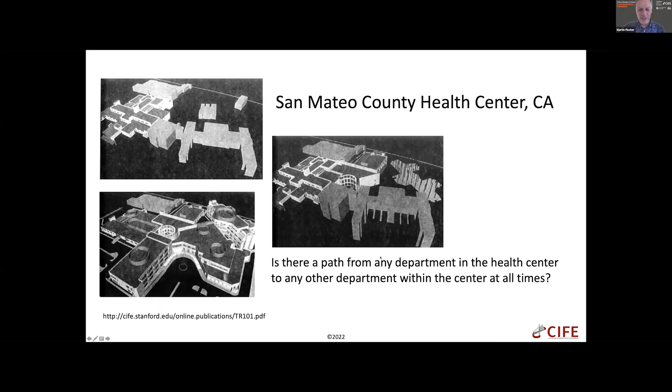But if I summarize this in the VDC framework, the hospital operations needed to go on fully during renovation and extension, like that constraint in terms of access from every department to every other department within the hospital. Also, from a contractor perspective, from a project objective, they wanted to complete the work on schedule and without delays due to interference with hospital operations. So they wanted to keep being productive as builders, which they wouldn't have been able to do if there was interference with the hospital operation.

So some of the methods they deployed: we had weekly ICE sessions with the construction team and monthly ICE sessions with the client to review the construction schedule. And we also had the goal that we wanted to complete all of the construction, hospital operations, and appearance checks in 3 months. I think we managed to do it in 2.5, if I remember right.

On the BIM side, we needed a 4D model with construction activities, including temporary structures, at a level that allowed connection with the hospital activities. And we wanted to resolve 100% of the interferences we found each week. In terms of the process, we needed the construction schedule at the level of detail to understand this relationship with hospital operations. And we wanted to make it so that we could update the 3D/4D model every week with what was discussed in that ICE session.

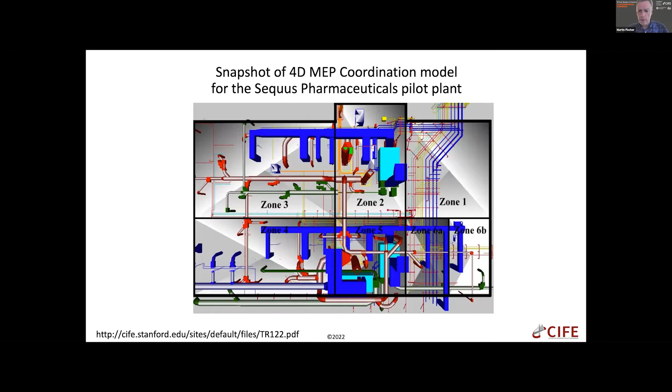And again, as I reflected in preparing for this talk about the application of the VDC framework, for the startup it was really, really critical that they could start to use the pilot plant on schedule, because their investment was tied to scaling up their technology. So the project team had to complete the construction on budget and schedule, and here they also had this objective of learning about 5D modeling.

Not surprisingly, we wanted to resolve all the conflicts, and they were managed at a much more detailed level, in terms of the 3D coordination, but also the daily construction coordination. We wanted to manage them every week, and basically that's where you see the controllable factors described as weekly sessions with the 4D model with detailed construction activity at the daily level, integrating the GC and the MEP schedules.

Similarly, the starting point was maybe slightly different here in terms of aligning the cultures of the project team. But then very quickly, we really integrated the organization, as you could see with the architect, engineer, general contractor, MEP contractor, supported by this 5D model. But also in creating this 5D model, the major process changes came in terms of these weekly coordination sessions. In 1997, that was not typically done.

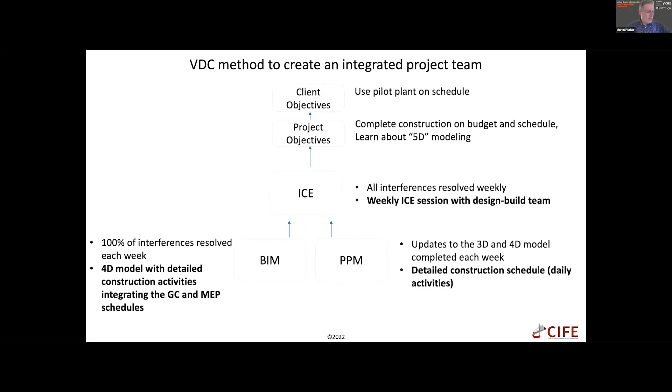And the third example I want to share is more recent. Our first full, what I would say full is always a tricky word, but full optimization project, was done with Filippo Ranalli and many other parties you'll see in a minute. This was an office building in California, and included a developer, general contractor, structural engineer, steel fabricator, and steel erector. It really was motivated by Brian Grass, the project executive for this project for DPR. He was wondering, after seeing a presentation on optimization of structural design and automation and optimization, whether we could create faster and fuller feedback on architectural design.

So, you know, these design cycles are just incredibly slow, and then we end up with a structure that's, I'm not so sure, really optimal. We were also curious to really push the limits of optimizing structural systems and understand whether that's worthwhile, and what the impact of that is. So here, again, from the research side, we wanted to study the technical and organizational feasibility, effort, and impact of an optimal composite steel concrete structural design.

As you can already imagine, there are quite a few issues. We had to get access to the structural engineer and the analytical model they had done in great detail. We had to get access to all the fabrication, construction, and erection cost data, because otherwise we would be limited to just optimizing for the steel weight, for example. We also had to get access to the development constraints and the architectural objectives and so forth. But I'll come back to that.

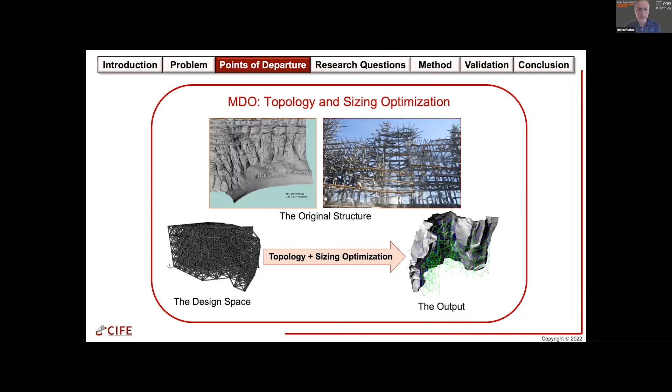As a result, the secondary steel connecting the face of the mountain with the primary steel is always on the critical path. There's never enough time, and you end up spending typically much more money on the secondary steel because you just have to make it happen. So this theme park operator was wondering whether this structural steel design for the secondary steel could be automated.

Filippo was working on that project as a summer intern, and it was really quite surprising and amazing to see the results in terms of the weight reduction we were able to achieve with an optimal steel design. It looks kind of similar if you look on the left and the right, but in fact it's 42% lighter and has 47% fewer unique connection details. So significantly better to erect as well.

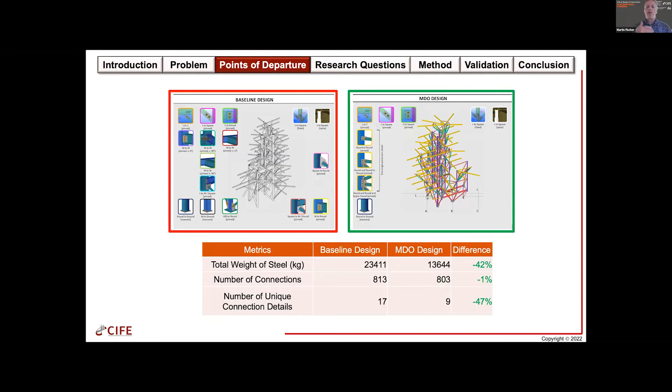But this was a relatively limited optimization problem, focused just on secondary steel. We were wondering what it would be like to take this to a whole building, or the structural design of a whole building with all the aspects. Is it feasible computationally? Can we get the cost data? Is the problem size just too big? Can we break up the problem in ways that make it feasible and also useful in the industry?

So the building on the left is not exactly the building we looked at; the actual one is larger and more complex, but for confidentiality reasons we can't show it directly. It's a major office building, 20-30,000 square meters, the kind you'd find in a downtown area of a major city here on the West Coast. We actually worked with two buildings, one where we could learn how to do the optimization, and a second one where we could test it.

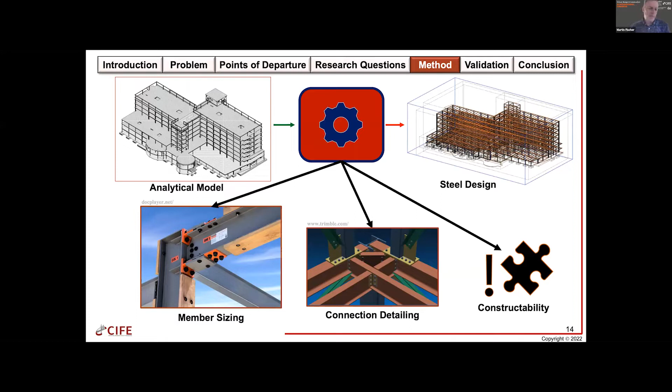I'm going to show the results of the test. The goal was to optimize the steel composite design of the steel and concrete structure, including member sizing, connection detailing, constructability, material cost, erection cost, fabrication cost, and of course structural safety and code compliance, all of which could not be violated. So this is what we're trying to show here, a full structural steel optimization. We were curious whether this was feasible.

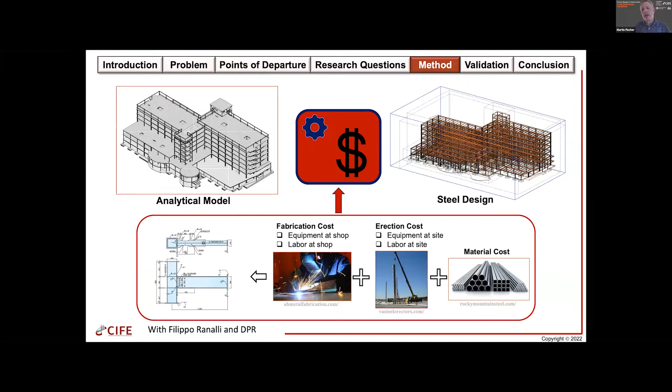We were able to find a way to make it feasible, and then looked at the effect of integrating cost data with the ability to optimize. Here is the comparison of the structure designed by a very good structural engineer in today's traditional process, versus what you could get by deploying this optimization method. You can see that the optimization method leads to a structure that's 10% cheaper, and it was done in an hour versus several weeks for a typical design.

And it's interesting also to see that all of the savings are pretty much coming from the detailing side of things. So this was really a bit of a wake-up call for me to reflect on what the major structural steel design is - you can see it's essentially the same, the steel weight. And that's decided fairly early in the design process.

But then by that, you're locking in particular ways of having to detail the structure. And by the time you get to those details, you can no longer go back to the main structure to change it. But here, because we can consider all of these aspects concurrently, we can vary the primary steel design so that it becomes much more constructible, and that really is where the 10% savings are coming from.

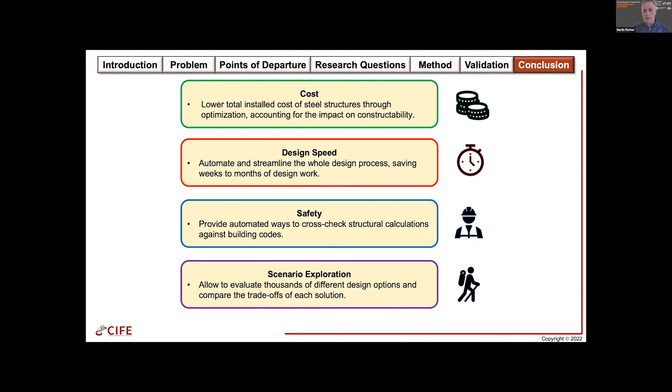So in terms of the VDC framework, we, again, you could say, well, focus a bit of a technology-driven project where we focus on developing this optimization method, which included, for example, automatic transfer of the architectural BIM to the structural connection with the structural BIM into the optimization method, which is one thing I posted there.

But very quickly, we realized that we have to learn a lot about the process, in terms of the production process and the cost, but also in terms of the effect this has on the design process and the collaboration between the developer, the structural engineer, general contractor, steel companies, and steel erection and fabrication companies.

And that affected, of course, as you can imagine, very much the work they did in terms of the workflow, the process, the aspects they managed, and then the coordination sessions to align the design, production, and cost information that were needed. So we had to do things that they normally don't do, but many things that they normally do fall by the wayside - you no longer have to do because now they are automated in the computer.

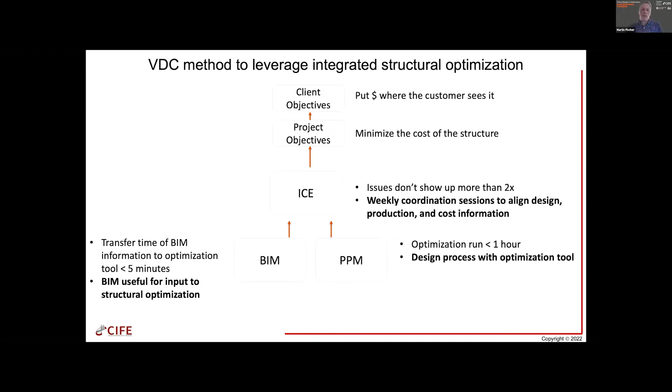In the interest of time, I'll jump over these. We have had the privilege, the pleasure to work with many industry applications over the 30+ years of CIFE, very much in that spirit. And I found really these two statements as guiding our research.

The automated execution of processes changes everything. That's the business perspective, and that's what we see, right? Structural design in an hour is a very different story than structural design in a few weeks.

But that connects very well with the scientific perspective, which is, for me, very well expressed by this quote from Donald Knuth, a computer scientist at Stanford. Basically says, trying to automate something teaches us what we know about the problem and what we don't know. And when we know enough about it, we can automate it. When we don't know enough about it, then it stays an art, something human judgment has to deal with.

And so from a research perspective, this becomes basically the way to understand the limits of today's knowledge and to extend it. But then the VDC framework is super helpful to connect the research, the academic, and the industry perspective. Because as you could see, we could not do this research just in the ivory tower of academia. We have to collaborate with industry.

And by necessity, then you're very quickly talking about what is the computer doing and what are the humans doing. So you immediately have to focus on the ICE and the BIM part. And BIM understood quite broadly in terms of creating useful information and using useful information. But that by itself would not give us very defendable research results.

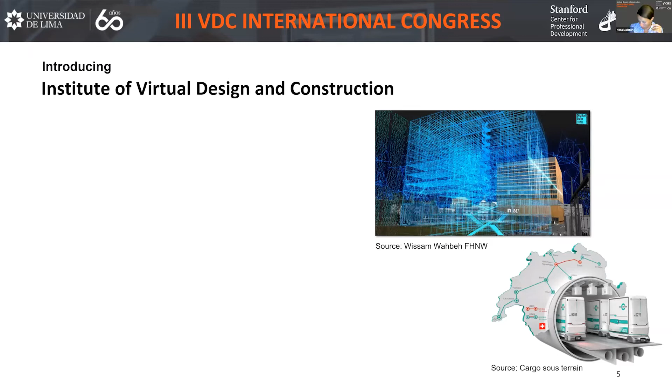Within that university there's the School of Architecture, Civil Engineering and Geomatics, and within that is the Institute of Virtual Design and Construction, where I am based. It's one of the bigger institutes in the School of Architecture, Civil Engineering and Geomatics, and we have an interdisciplinary team with backgrounds in engineering, architecture, and construction, focusing on organization, information modeling and management, and also collaboration and process design.

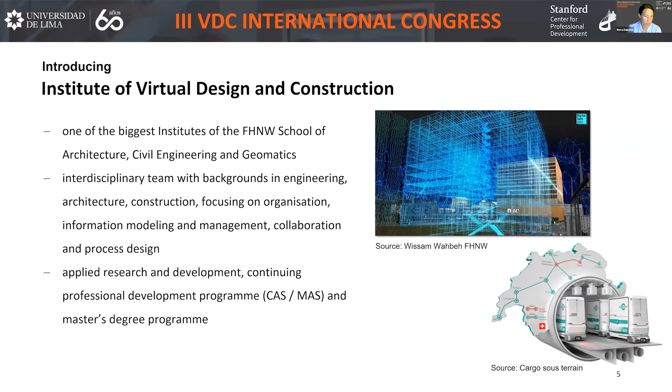We do have applied research and development. We have a continuing professional development program, which includes a CAS or an MAS, and also, which you might know, the VDC certification program, which is also part of our program. And relatively new, I will explain, is the master's degree program that the further presentation will evolve around.

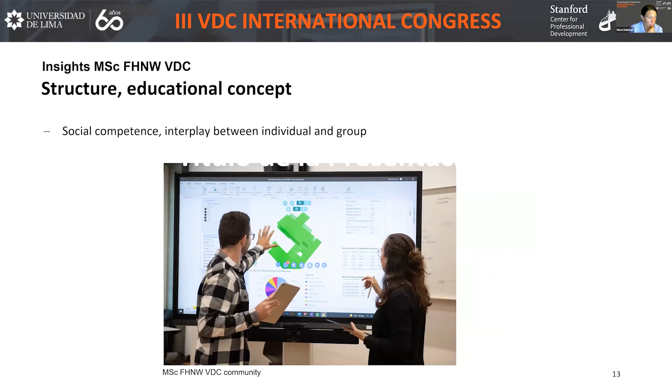Once again with this VDC framework, the coming together is really important. Looking at the ICE session, is it better if in a large scale project one person talks for 3 hours and thinks that covers all the necessary bits, or do you do an ICE session, a big room where you really integrate what you learn from each other? I guess there's a better version of these two options. So to enhance social competence and the interplay between individual and group is important for our study program, and we find a lot of that in the VDC framework.

Now I'd like to come to the third part of my presentation. I'd like to show the experience industry reaction we have had.

We've got 16 students that started in '21. In autumn '22 we will start with a similarly sized group, and so far we've got very positive feedback from the industry. We have future employers that are already seeking to employ students before they have even started. But to show you where I've got this information that we've got very positive feedback, I'd like to give you 3 examples from our study program.

We have these integration projects, which I explained more or less how they work. We've done 6 different projects in the first year with partners from industry. Our students worked in interdisciplinary groups, and the partners offered research themes from the building industry. Students have 10 weeks to develop the project, then it gets presented and challenged and commented on by our partners. One of our partners actually called it a success story, because for them it's very important what they learn from us, and for our students it's very important what they learn from our partners.

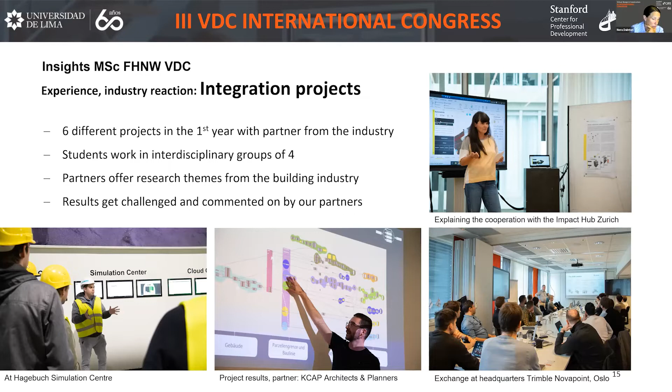The second example is the International Study Week in Oslo we've done. This is a fixed part of our program, one International Study Week each year, and Oslo was a very good option to start off with. We visited various construction sites, planning offices, universities, exchanged with stakeholders - it's about insights and experience, and also exchange and opportunity to broaden our view and our network. Hans Thomas Holm from Statsbygg was a fantastic contact to open many doors and show us very interesting construction sites. We got to visit Snøhetta, had a fantastic time doing takt planning as a workshop, and got a lot of interesting insight from the industry.

All our partners there, we asked what they think about the program and about the students - we met a lot of enthusiasm. Interesting was we asked our students to sum up after the week what they really take home from this week in Norway. They said to plan together and invest in a culture of trust is very important, and also to use customer goals, project goals, and metrics for successful projects. They also often quoted something Hans Thomas Holm said: what you give is what you get. This is also something I think is very true for education in general, and for what we try to achieve with this study program.

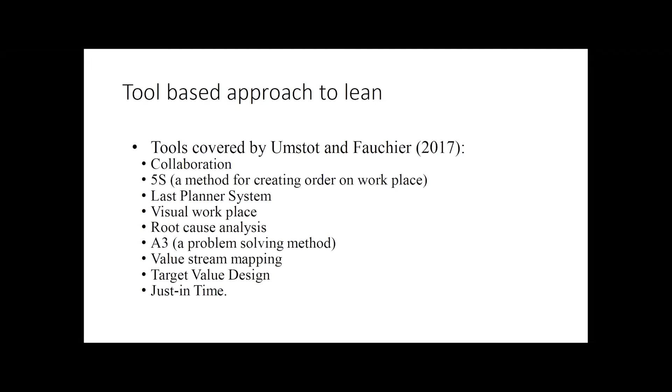This is not all. I have been claiming that lean is a theoretical and philosophical innovation, so there has been a theoretical conceptual shift. The big problem is that it has not been explicit where we have been earlier regarding theories, so this shift is not easily understood. However, it is about how we see production, how we acquire knowledge, and how we see the world to be.

Usually we don't speak about theory of production, but we are using some theory of production all the time. I have been arguing that lean is an innovation on three frontiers: theory of production, then a part of philosophy, ontology, and another part of philosophy, epistemology. This corresponds to what I said on the previous slide.

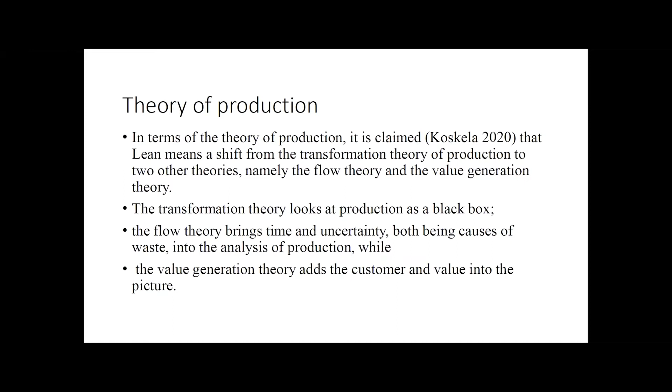If production is not discussed theoretically, we engineers speak even less about ontology, except in computer science perhaps, and epistemology. Regarding ontology, lean is supported by process ontology, which stresses the changing and relational nature of phenomena. The earlier and still mainstream approach is thing ontology, where ideas of stability and decomposability of things are emphasized. Regarding epistemology, lean is Aristotelian in the sense of two-way traffic from ideas to the world. The mainstream counterpart is Platonism, where the traffic is in one direction from ideas to the world. Engineering sciences have traditionally been extremely Platonic.

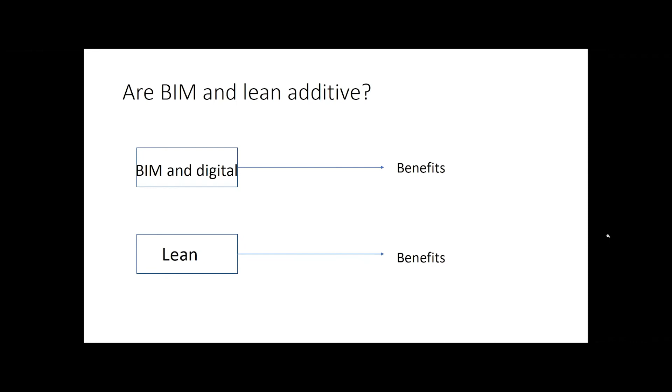No, this is not so. For 10 years already, it has been argued that BIM helps lean, BIM is contributing to lean, so BIM creates benefits through lean. There's much literature on this. The other direction, lean contributing to BIM, has not been looked at that much, but it is there, and I'm arguing that it's important too.

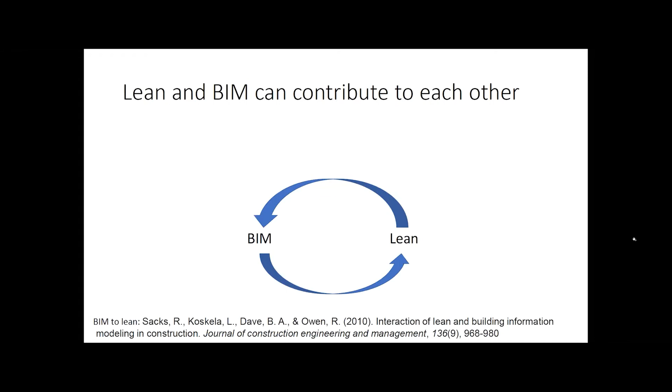I'm not going into this 2010 paper looking at the interactions between BIM and lean. Rather, let's look at a fresher case, how lean is contributing to BIM, and of course this direction was not looked at in that paper at all.

We have been collaborating with an engineering design company dealing with highway design, and we have tried to support lean implementation in this regard. When looking at how clash management is being done, we were very surprised that when the detailed design stage started, there's a huge inventory of clashes, 8,000 or so clashes, and then the designers start to eliminate those clashes.

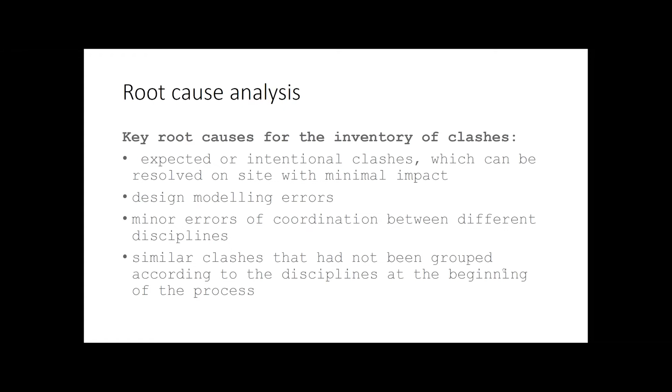Based on these root causes, countermeasures were developed, and they deal with the process itself, structure and transfer of information, and standardization and automation of time-consuming activities.

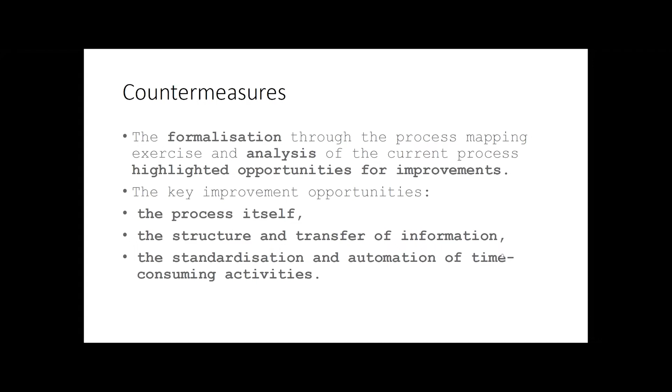So of course, early identification of client requirements, which I understand is very much a part of VDC, standards, process mapping techniques, and then a one-piece flow rather than batches. This is at the heart of lean. One-piece flow for dealing with clashes. Mistake proofing, another key part of lean. Improve process standardization, automated approach when possible, flow management and control approach, systematic waste analysis, and so on.

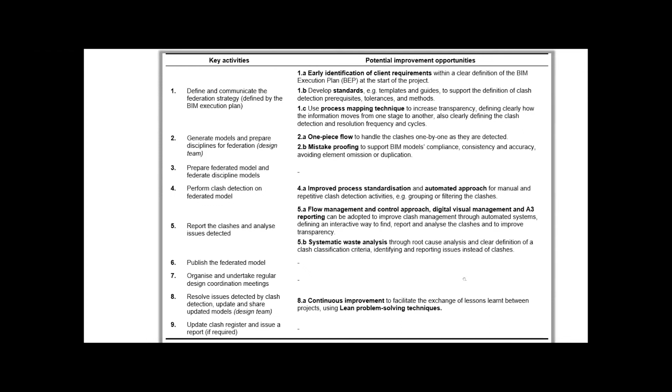So there's a wide variety of lean techniques that can be used for improvement of this clash management process. And of course, we know that clash management is touted as one of the key benefits of BIM, but it doesn't come by itself. There must be a process, and it can be improved and managed through lean tools.

Then a fresh example of this digital to lean direction, and this is about digital whiteboard technology, which has been used in the context of last planner management of design in the same company. And especially when during COVID-19 people started to work from home, it was almost a necessity to find something like the digital whiteboard. Before that, LPS, last planner system meetings, were physical meetings where information was presented or communicated by projecting computer screen to the wall, by sending information through email, and so on.

Now, it's interesting to compare a physical whiteboard to the digital whiteboard. Physical whiteboards are used in lean meetings and otherwise. So a whiteboard is visible to everybody in this space where the whiteboard is. Digital whiteboard is visible to everybody who has access, irrespective of location.

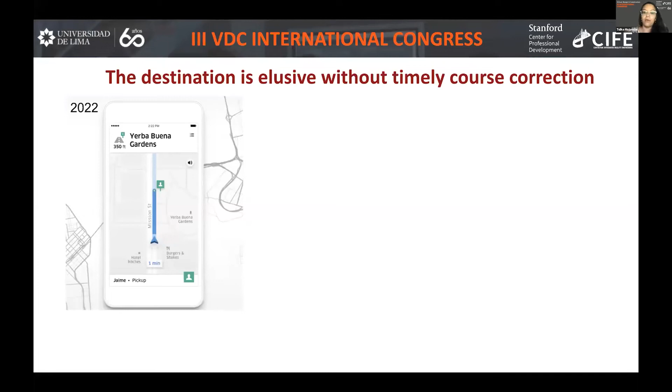What I mean to say is, let's go back to our 2022, we're in an Uber or a Lyft, and the driver has taken off. But if the driver is not keeping an eye on whether there are any road closures, anything else happening on the route, and doesn't do timely course correction, how likely are you to reach your destination on time, or even reach at all, right?

So really, it makes me think - metrics are a very, very integral part of the VDC methodology. But when I think back about my professional life, and how we were defining the project objectives, client objectives, and working towards them, it makes me feel like we are back in times like 1492, when Christopher Columbus set sail from Spain to reach India.

However, we don't know what happened during the navigation. Maybe they weren't doing it. My thinking is that the navigation system was not sophisticated enough to really guide them on a regular basis where they were headed, and instead of India, the ship actually landed in the Bahamas. And we don't want that to happen on our projects.

And this is where I want to go back to Martin's point about being a student being easier than being a professional, because here is where it's easy. Now that we have the VDC terminology and a common vocabulary through the VDC framework, it's easy to talk to people about defining their client objectives, project objectives, and production metrics, which you measure on a regular basis. I didn't have that vocabulary when I was working as a professional on that project. And so this problem became one of change management. It becomes even more complex when the client is a group of people who are all at different levels of understanding of objectives, metrics, or modern management methodologies such as VDC.

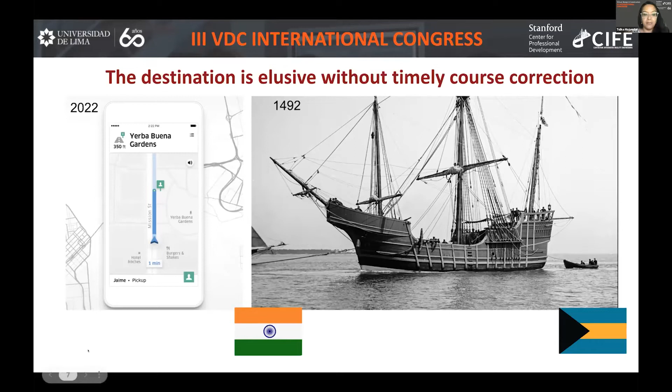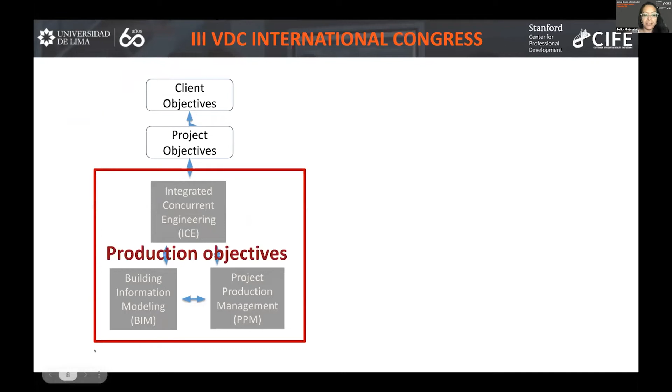So from here on, my presentation is only going to be about production objectives or production metrics, which we track on a daily or weekly basis in order to reach the project and client objectives, right? They are daily or weekly in nature.

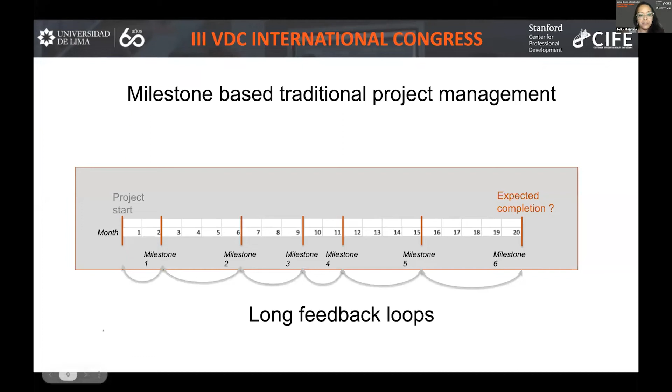We are all familiar with the milestone-based method of managing projects, right? More traditional - there is a project start date, a project end date, and some milestones in between. This is a good system, except the feedback loops from milestone to milestone often tend to be too long. And by the time the project team tries to make up for a milestone that was missed, there is a ripple effect on the milestones that are coming up.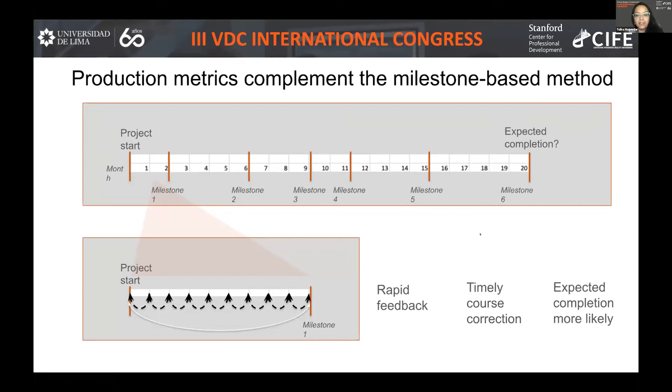And that often leads the project to fall off track. Production metrics really complement the milestone-based method because they are daily, weekly in nature. So think of them as small yardsticks that give you much more rapid feedback. If, in the same example, instead of just one feedback at the end of milestone 1 there were, say, 8 feedback loops, then the feedback is more rapid, and this makes it possible for rapid, timely course correction, which then makes it more likely that the project will complete on time and achieve its objectives, right? So production metrics really are the link between the actions we take on a regular basis and the outcome we expect at the end of the project.

I'm going back again to my project that I was sharing with you, where the schedule duration had to be reduced from 40 months to 18 months.

These are the actions and decisions that we take on a regular basis on a project: which technology to use, who to hire, what sort of process or workflow to use, in the hope that we will ultimately meet our client and project objectives, which in this case, the client really cared about the throughput that would come from the plant, and they wanted a reduction in the construction duration.

So while controllable factors really vary a lot, the yardsticks that you would use to measure these actions - my hope was that there would be some similarity in the things that you would measure, which are output metrics as a result of the actions and decisions taken.

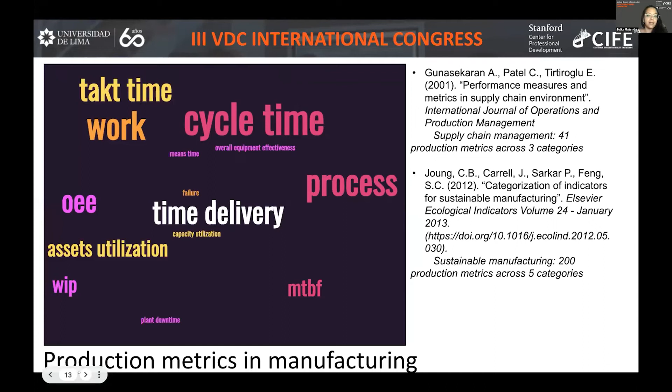So if we look at other industries, such as manufacturing, they have a standard list of production metrics. There are papers published, and even if you just Google production metrics in manufacturing, you'll see a list of some standardized 30 to 40 production metrics: cycle time, asset utilization, work in process. There is no such list in the construction industry, no industry-wide standard list. People do track something or the other, but it's not like there is a consolidated list somewhere for ready reference.

That was something that really surprised me when I came back to Stanford as a researcher. And I was wondering, so how should we go about building a go-to list of production metrics for construction? Now, the truth is that while project teams do measure something as they go along, and they are constantly, hopefully, doing course correction, the knowledge of whatever they're doing stays within the project team itself.

So either they don't track, or if they track, what they're tracking is not shared across projects, even within the same organization. That is something that I noticed when I started working with Martin on the VDC certificate programs that CIFE runs in collaboration with PPI and SCPD, and now along with the University of Lima and the Norwegian Technical University, NTNU.

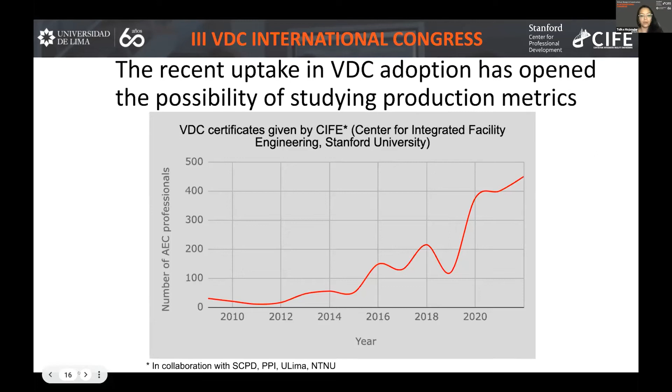This made me think that we have so many people implementing VDC in different parts of the world in projects. And because metrics are such a fundamental part of the VDC methodology, surely they are tracking metrics, and we can make use of this knowledge coming from so many projects being done at the same time, following a similar methodology. And I changed my question somewhat - from how to build a go-to list of production metrics, to which production metrics are VDC professionals finding useful. The assumption is they are using the ones that they are finding useful.

And this is something we noticed: at the start of a VDC implementation, typically people start with a large number of production metrics, and then they whittle it down to a few as the project progresses, as they realize that some metrics are not making much sense.

These are run in collaboration with SCPD, Ulima, and NTNU. We went through the monthly reports submitted by participants and curated 2 data sets of production metrics from the first large-scale program in Norway and the first large-scale program in Peru. I'm using Scandinavia and Latin America because the Norway program had participants from Sweden and Denmark as well, and the Peru program had participants from Brazil, maybe Colombia. So data set 1 is Scandinavia, data set 2 is Latin America.

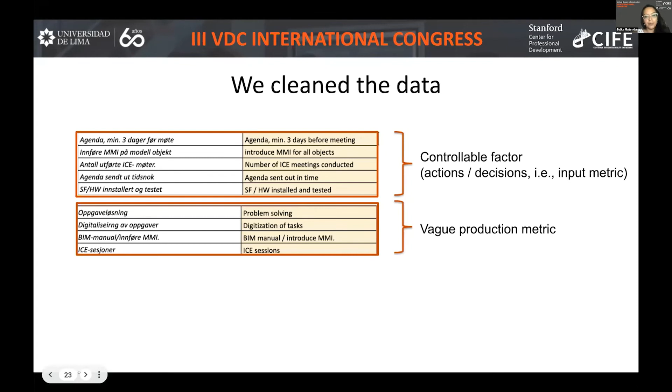As I said when talking about metrics earlier, actions and decisions are input metrics—these are not things that you measure, they're things you decide to do along the way. So those were removed from the data. Vague production metrics, such as problem solving or digitization of tasks, we removed. We also removed client objectives and project objectives measured at the end of the project, as well as objectives measured at specific milestones rather than on a regular daily or weekly basis.

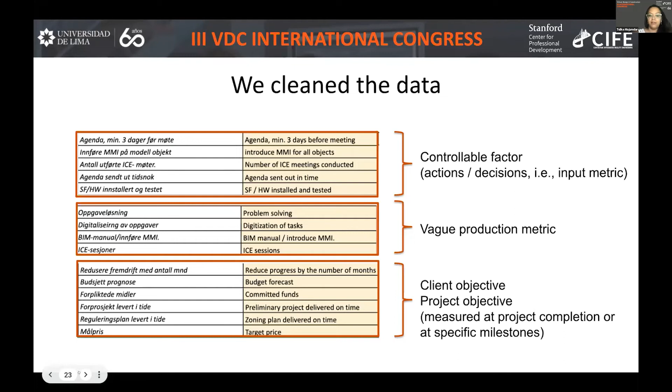Once we had cleaned up the data, we prepared a combined list of 17 production metrics found in the literature to label the curated data set, so we could start seeing the similarities and differences. These metrics from the literature were based on an early paper by Professor Martin Fischer and John Kunz from CIFE, and another by Eilif Hjelseth, the professor in Norway who spearheaded the Norwegian large-scale program with his colleagues. We combined their recommended production metrics and published a paper with our findings.

What we found was that of the 17 production metrics in the literature, 3 were heavily used or reported in the data sets we studied. The first was detailed schedule conformance, the second was stakeholder involvement, and the third was meeting efficiency. These were reported by more than 40% of the professionals in both data sets.

Then there was a second group of production metrics which were very lightly used, reported by less than 10% of professionals in both data sets. I was quite surprised to see decision latency in there, because as we've seen on projects, decisions not taken on time are really what make a project fall off track. There were also metrics on detailed cost conformance, field material delivery, meeting agenda appropriateness, client satisfaction, safety, and visualization that very few people reported on.

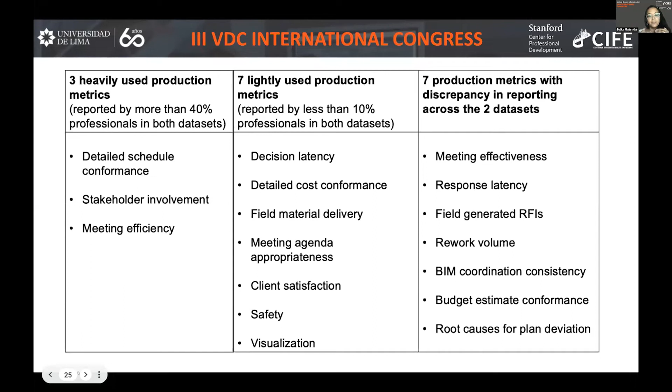As we looked at the results, we realized something. It gave us good insight into similarities and differences, but it also seemed like VDC is reaching a certain maturity among people enrolled in the certificate program who know VDC. So we thought a more current classification of production metrics is required, because the older one has individual production metrics like decision latency, under categories such as safety, visualization, or detailed cost conformance, with multiple metrics under each. So we wrote another paper, myself and my co-authors, research collaborators from Norway, Peru, Alexandra being one of them, and of course Professor Fisher.

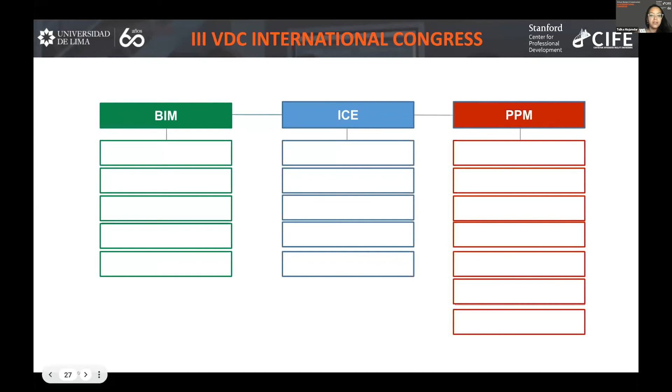We classified the production metrics, the same ones used in the previous study, using ICE, BIM, and PPM, the three key pillars of VDC familiar to the VDC community. The idea was to have BIM, ICE, PPM at the top level, then subcategories of production metrics, and under them, individual production metrics. This is still a work in progress, so I'll just talk about the highest level, not the subcategories.

We saw that ICE and PPM production metrics were reported by more than 65% of professionals in both data sets. BIM, interestingly, was reported by only 30% of professionals in Scandinavia, but 91% in Latin America. This could be because most projects professionals in Scandinavia represented were infrastructure projects, and there have been studies showing BIM tools are used more on building projects, or perhaps BIM production metrics, such as hard clashes, are reported more when used on buildings. We haven't dug deeper into that.

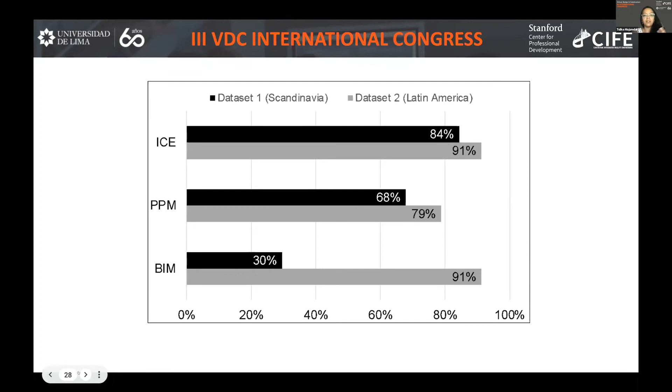But what we saw was that ICE and PPM are being used by both in a similar way. The next thing I was curious about was how integrated these pillars of VDC are in practice. VDC theory says you should use ICE, BIM, and PPM all together, but in reality, what is the case? Interestingly, in the Latin American data set, 68% of professionals used all three, while in the Scandinavian data set, only 17% used all three.

It was also interesting to note that for ICE and PPM, again possibly due to project type, 40% of professionals in Scandinavia used ICE and PPM together, whereas only 16% in Latin America used both. It was good to see very few professionals using just one element. The results were similar somewhat, we had expected a spread with similar trends, so not very surprising, but I was a little surprised that only 17% in Scandinavia were using all three elements. So far we were at the production metric category level.

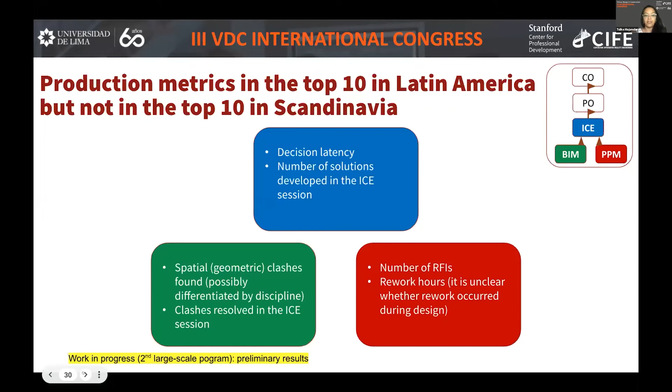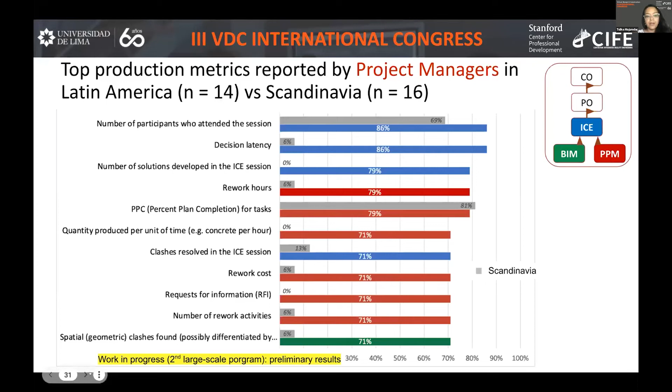And this is what I'm trying to get to, is that, is there a rhyme or reason why this difference? Could it be based on the project characteristics? Could it be based on the role of the person who's actually reporting this production metric? Or is it that certain production metrics are just difficult to track or measure? So those are the things where we are headed next.

But why does this research and results really matter? If you think about it, by creating this classification, ICE, BIM, PPM, and then the subcategories that we will propose in the next paper and the individual production metrics, we are really creating a common vocabulary of production metrics. I mentioned earlier that there are two scenarios: either people are not tracking any production metrics, or even if they're tracking, somehow what they are tracking is getting lost because there is no common vocabulary yet. So by creating this common vocabulary, we hope that this will enable comparison across projects and so facilitate benchmarking. It'll enable repetition of VDC practices, so allow companies to do continuous improvement.

So if I go back to the project, my Australian project, we were trying to use VR. Well, the client didn't make a decision, but if they had, and we were seeing good results, then that would be a practice that they could use on future projects, right? Using VR in the design phase.

This common vocabulary facilitates strategic decisions and standardization of metrics within an organization. So say a company, now that VDC theory says that we should be using all three elements, and a company notices that, on so many projects, 10 projects, we have been reporting ICE and PPM production metrics, but we're not reporting BIM. Maybe it's time to do a strategic hire. Maybe it's time to train our employees on the latest BIM tools. Now, such strategic decisions can then be taken, and standardization of metrics within an organization.

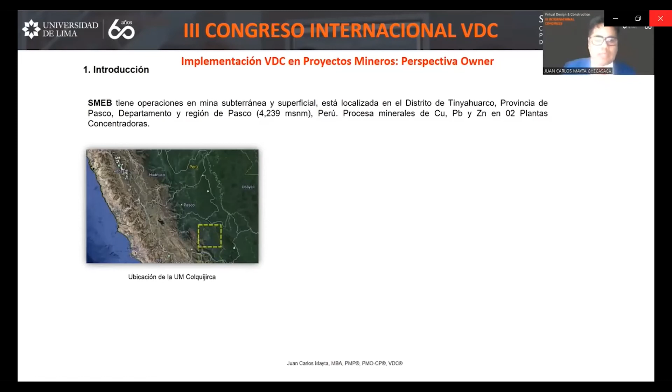Como ya les había adelantado, procesa minerales de cobre, plomo, zinc, etc. Está operando con dos plantas concentradoras, como se puede ver aquí en la imagen, con la ubicación de dos áreas de chancado, molienda y flotación.

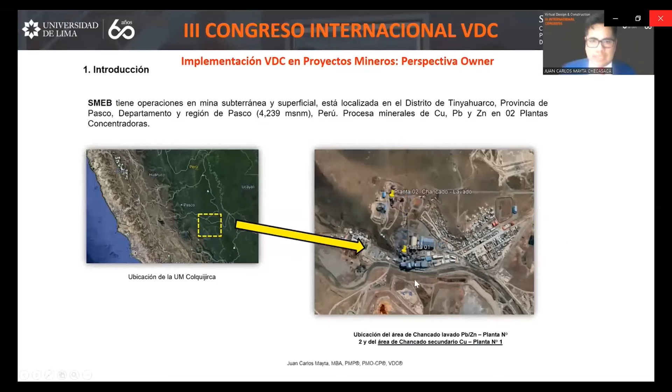Pero nosotros vamos a hacer el caso de estudio en una de ellas, justamente en el área de chancado secundario de cobre, ubicado en la planta número 1, que es la que está en la parte inferior.

Esto es importante entenderlo porque todos los proyectos son distintos. Este es un proyecto de reemplazo de equipos estratégico para la empresa, puesto que estaba planificándose dentro de la gran parada de planta que íbamos a realizar, en una ventana de aproximadamente 14 días.

¿En qué consistía? Consistía en intervenir el reemplazo de dos equipos estratégicos, en realidad un equipo estratégico vinculado a un sistema de chancado. Ese equipo era este chancador primario. Acá tenemos una chancadora de quijada que teníamos que reemplazar, y también realizar la ingeniería.

Teníamos que adecuar y mejorar esta tolva de grueso, que era el embudo donde se recibía el mineral procedente de la explotación, y que luego pasaba por un grizzly o zaranda, para después pasar a un proceso de chancado mayor, la chancadora primaria.

Algo que aparentemente podría ser sencillo involucra un reto, porque implica conocer mucho del proceso de chancado, los tiempos que vamos a estar trabajando, además las interferencias que vamos a tener, no solamente dentro del proyecto sino también con todos los terceros que van a trabajar dentro del área de influencia. Y mucho pesa la seguridad.

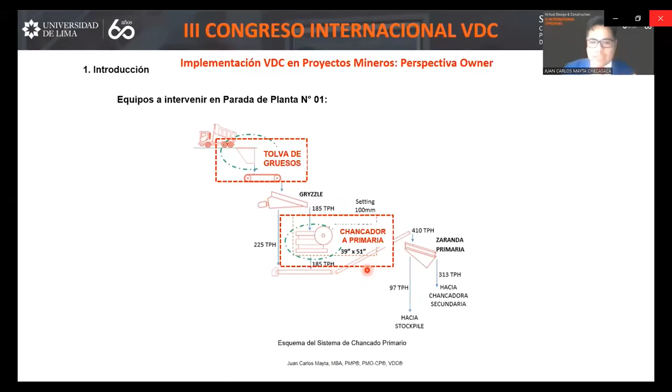La seguridad es parte de un objetivo dentro de esta implementación VDC. Dentro de esta introducción quería mencionarles la importancia de saber cuál es nuestra área de influencia y cuál es nuestra forma de trabajo cada vez que implementamos VDC.

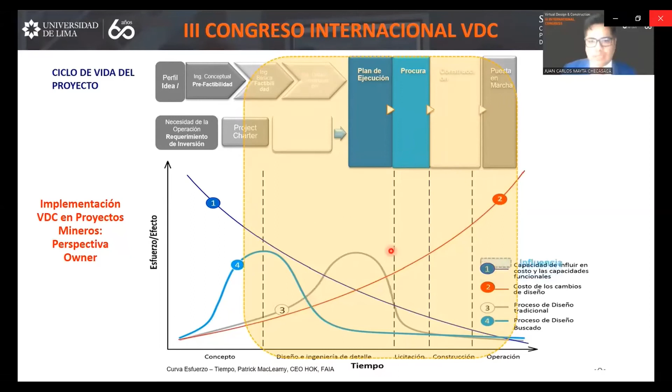Acá les traigo una curva que quizás han visto muchísimo, la curva de esfuerzo de tiempo de Patrick MacLeamy, solo para mencionarles que esta área es la que como propietario he tenido la oportunidad de influenciar, ya que desde las etapas tempranas he podido ver la parte de diseño y luego cómo en la etapa de construcción se pudo llevar a cabo.

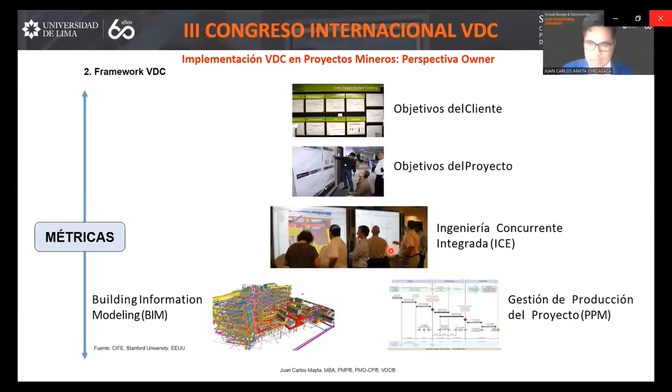El framework al que me refiero aquí, creo que ya lo conocen, lo voy a pasar rápidamente. Solo recalcarles la necesidad de tener siempre esta articulación: objetivo del cliente, proyecto y las tres patitas de la mesa, ICE, BIM y PPM, obviamente vinculado con métricas y factores controlables que van a tener cierto nivel de consistencia para conseguir el objetivo final.

El resumen de la implementación consistió en llevar a cabo una estrategia para cumplir el plazo del proyecto dentro de esta ventana de los 14 días de parada de planta, y además garantizar una satisfacción del usuario para la operación y mantenimiento.

Como se ve en la parte derecha, es importante entender el objetivo del owner o cliente, en este caso nuestro. La misión era garantizar la sostenibilidad de las operaciones de la planta para manejar esta reducción del tiempo estancado con este nuevo equipo y ampliar un 20% de su capacidad de procesamiento.

Esto nos lleva a tener que licitar o desarrollar una ingeniería, que luego se va a implementar en la etapa de construcción, para que ésta sea lo más confiable, segura y operable posible.

Desarrollamos sesiones ICE como parte de ello, involucramos actores clave, nos orientamos a la constructabilidad y mantenibilidad desde la etapa temprana del proyecto, realizamos una planificación 4D para simular el proceso constructivo más idóneo, además de identificar incompatibilidades e interferencias, y nos permitimos mejorar la gestión de la producción y la planificación del proyecto, pensando en seguridad y en construcción.

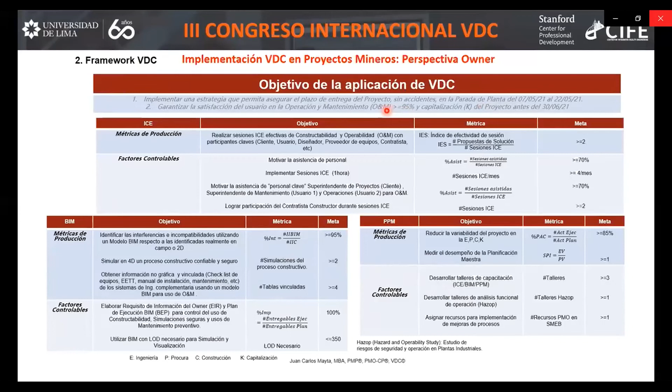Siempre con esta estrategia de buscar justamente los objetivos del proyecto y los objetivos del cliente. En este caso, 0 accidentes y asegurar el plazo dentro de la ventana de la parada de planta.

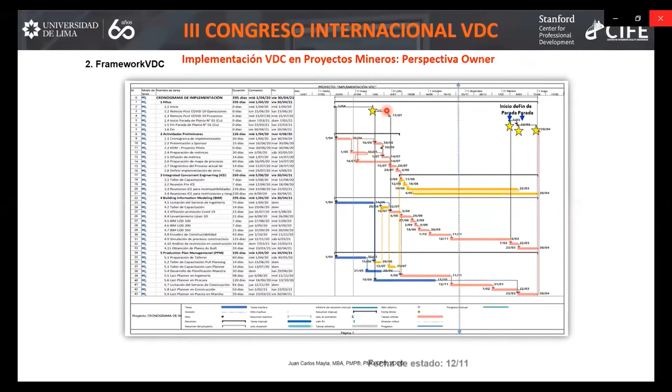Otro punto que traigo a compartirles es el poder llevar esto como si fuese un proyecto. En Compañía de Minas Buenaventura era la primera vez que se hablaba un poco de esto, hace ya 2 años, hoy en día es un poco más conocido. Sin embargo, era necesario trabajar mucho la parte de capacitación, ir de a poco, dar a conocer a través de talleres la necesidad de por qué trabajar con VDC y por qué trabajar con modelos. En el mundo de la minería les conocen como maquetas.

Algunos resultados que quería compartirles: pudimos darnos cuenta la necesidad de desarrollar algunas ingenierías complementarias de componentes adicionales para agregarle valor al proyecto. Por ejemplo, necesitábamos tener un puente grúa que permita mejorar el mantenimiento de este equipo y no tener que hacer un reemplazo a través de un izaje de grúas solamente cuando tengamos que hacer un reemplazo del equipo, sino de forma periódica y constante.

Vamos a tener que instalar un sistema de rompebancos en la parte superior para mejorar la granulometría del material que iba a ingresar en la zona de tolveo. Se hizo una propuesta de instalar un sistema de cámaras para mejorar el tiempo de respuesta de los eventos en la planta. Esta zona tenía bastante polución, entonces se implementó un sistema de extracción de polvo en la parte inferior aguas abajo y un sistema de iluminación para evitar cualquier accidente o paralización de procesos durante la operación.

Todo eso permitió mejorar la operatividad y riesgos. Esto lo estuvimos manejando desde la etapa de ingeniería básica y detalle, y justamente empezamos a trabajar con los modelos BIM apenas teniendo nivel de desarrollo LOD 100, LOD 100, 200, y luego lo fuimos mejorando. Como yo siempre digo, le digo a mis alumnos, lo perfecto es enemigo de lo bueno, así que hay que empezar a tener las famosas ganancias tempranas, o los quick wins.

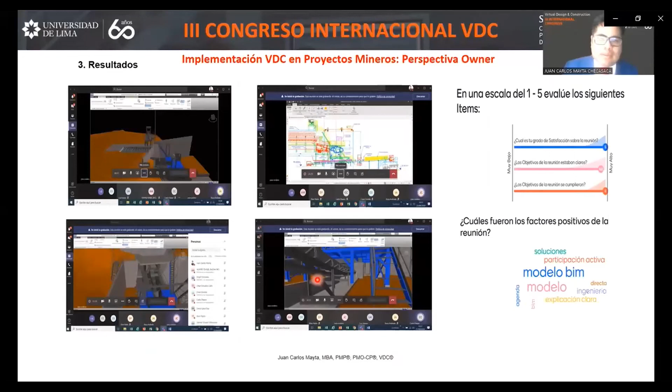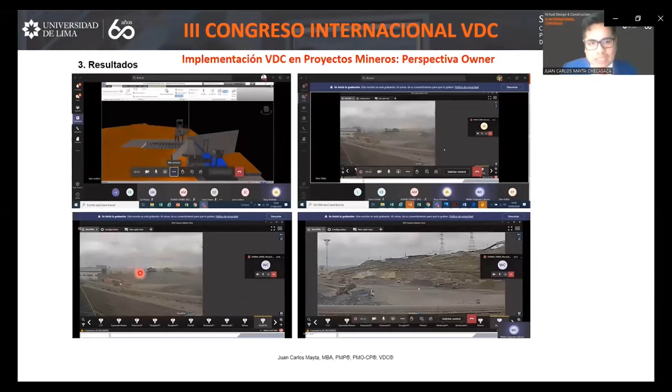Al margen de ello, es importante que podamos entender que hay otro tipo de tecnología disponible. A nosotros nos pasó que las personas del área de operaciones manejaban mucho, o tenemos instalados algunas cámaras donde uno puede ver cómo está descargándose el mineral y cómo estos llegan al sistema de tolveo para luego llegar al chancador. Entonces, llegar a hacer esa trazabilidad de esa información a través de las cámaras despertó la curiosidad del personal de planta, que es personal netamente operativo y que no necesariamente es ingeniero civil como muchos de nosotros, pueden ser ingenieros mecánicos, ingenieros metalúrgicos, ingenieros químicos.

Pero sí tienen mucha responsabilidad en los resultados de cómo se van moviendo sus niveles de recuperación de concentrados, sus desperdicios, sus niveles de agua, niveles de aire. Entonces ellos se dieron cuenta que podían ir encontrando otros beneficios más allá de trabajar con modelos. Cómo poder integrar esto, por ejemplo, con el análisis de producción del mineral, y cómo podemos optimizarlo en la medida en la que podamos también reducir la granulometría desde las zonas de explotación del mineral, lo que dentro de la minería le conocen como mine to mill.

Y bien, en la parte de resultados también me interesa mucho comentarles esto, el diamante de emoción del usuario.

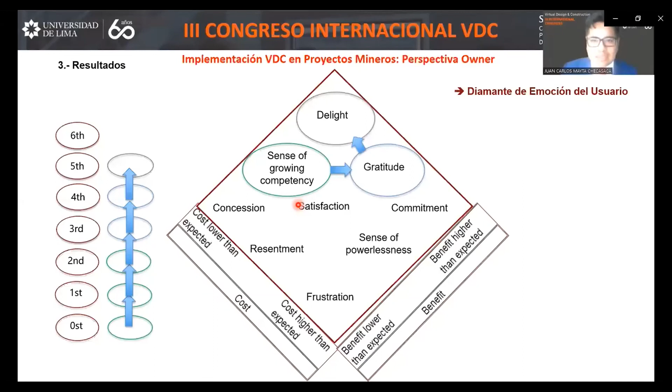Nosotros desde un principio crecimos con un sentido de competencias. Se buscó esta colaboración en todas las personas que participaron durante esta experiencia de casi año y medio de implementación. Y valgan verdades, muchas de las personas cuando les hicimos esta encuesta de alguna forma cualitativa en Menti, nos expresaron su gratitud porque aprendieron algo más y todos se fueron de alguna forma encantadas, siempre con los ánimos de seguir mejorando.

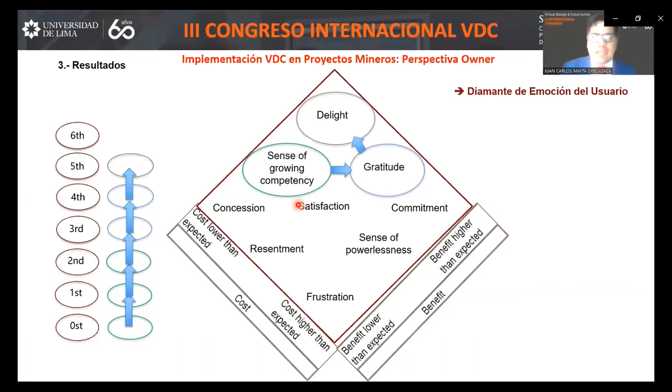De hecho, hemos trabajado esto no solo en la etapa de ingeniería, hemos trabajado en la etapa propia de construcción, en una siguiente parada a fines del 2020, inicios del 2021. Hemos también, ahora estamos implementando en un proyecto de un relleno hidráulico, también un proyecto underground y open pit, con retos distintos porque las personas son distintas. Y esto involucra también que poco a poco ya vayamos mejorando.

Y bueno, conclusiones, esto me gusta compartirlo también porque creo que VDC te permite tener una máxima colaboración al personal clave, llámese proyectos desde el cliente o proyectos del contratista, un usuario. Importante que también entienda cuál es el producto que va a recibir. Como alguna vez yo lo conversaba también con un superintendente de proyectos y le mencionábamos al superintendente de planta y de mantenimiento, le decíamos, necesitamos tu colaboración en alguna de estas sesiones porque vamos a diseñar un producto a tu medida, como el sastre.

El sastre que te diseña, te hace tus mediciones y al final te da un terno que justamente calza con tu biotipo, con tus medidas. Lo entendió de esa forma perfectamente.

El involucramiento con el usuario, como les mencionaba, desde etapas tempranas. Tuvimos la oportunidad de hacerlo desde etapa de ingeniería básica y de detalle con excelentes resultados en la etapa ya de construcción. La maximización del uso de modelo BIM a lo largo de todo el ciclo de vida, el análisis de constructabilidad y mantenibilidad, algo que muy pocas veces se realiza o no se realiza de una forma correcta, usando VDC lo potencia enormemente. Bueno, en otro momento les haré un poquito más del detalle de esto. Y los procesos de gestión de proyectos que tienen un enfoque holístico e integrador, a nivel de procesos, personas y herramientas.

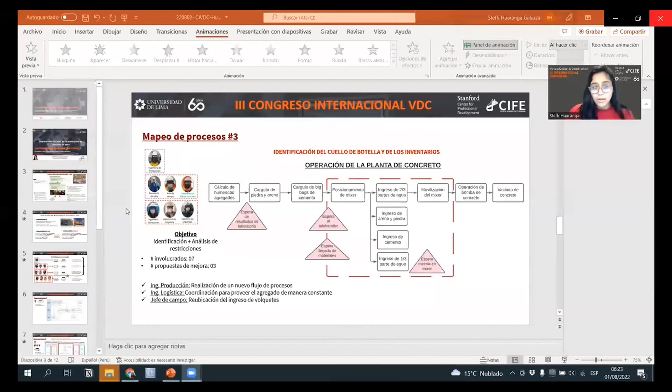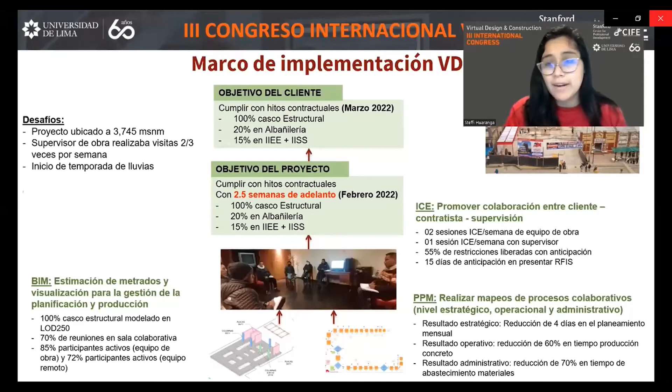El componente ICE fue empleado para promover la colaboración entre el cliente, el contratista y la supervisión. El componente BIM fue empleado para estimar metrados y como apoyo visual para la planificación y gestión de la producción en obra. Y finalmente el componente PPM fue empleado para realizar el mapeo de procesos colaborativo.

Entonces, este es el caso de estudio que presentaré hoy, que corresponde a la producción de concreto en obra. Como pueden ver, el elemento estructural en particular para este caso fue el de las cimentaciones. Esto representaba un volumen de 524 metros cúbicos de concreto. El equipo en planta con el que disponíamos fue una planta de concreto manual con botones y manivelas que necesitaban ser operados en tiempo real por una persona para producir concreto, una bomba y una pluma de concreto para colocar esto en las cimentaciones.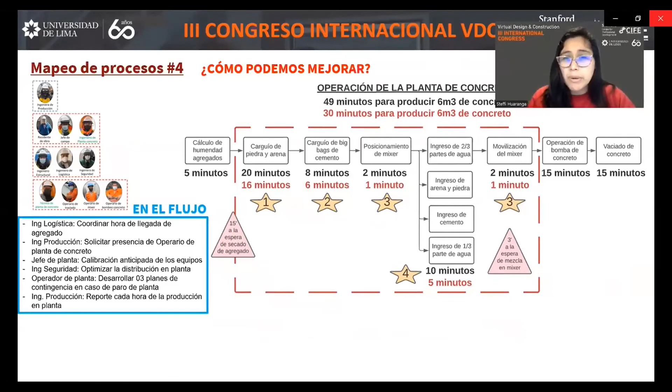Por ejemplo, solicitamos la presencia de más operarios, de más vigías. También solicitamos calibrar de manera anticipada los equipos para no tener que parar la planta para calibrarlos. Proponer planes de contingencia en caso el cargador se quede sin combustible, en caso la planta se atore, o en caso suceda algo que corte el flujo.

Y luego mejoramos en los procesos, relacionados a las estrellas que vemos en pantalla. Por ejemplo, el acarreo de piedra y arena, que inicialmente nos tomaba 20 minutos, recibió 3 propuestas de solución, como aumentar un vigía para que el operario de telehandler lo haga más rápido y más seguro, empezar de manera anticipada con los procesos —si el vaciado era a las 8, empezamos a trabajar a las 5 de la mañana recibiendo— y revisar estrictamente que la cantidad de volquetes llegue a obra y que estos estén llenos, para contar con el material máximo posible en campo.

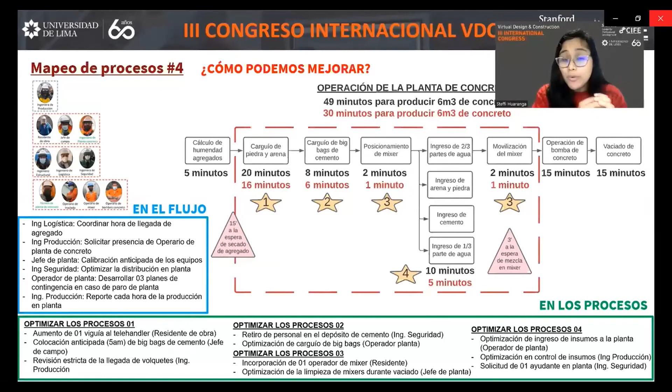Entonces así fue como las estrellas representan las propuestas de solución localizadas en los procesos, y obviamente hay una reducción de tiempo asociada a estas mejoras. De 49 minutos que nos tomó hacer los primeros 6 metros cúbicos de concreto, gracias a estas soluciones que realizamos todos en conjunto, nos tomó 30 minutos.

Como conclusiones, comparto que esta experiencia me permitió comprender que el desarrollo de un mapeo de procesos es dinámico, tiene que ser colaborativo, y este es el ejemplo claro. Si yo me hubiese guardado la información, probablemente hubiese tenido cero propuestas de mejora, pero gracias al equipo de trabajo y a su involucramiento tuvimos 22 propuestas.

El mapeo de procesos en el cual tenemos que enfocarnos tiene que estar necesariamente conectado a los objetivos del proyecto y del cliente para que sean incidentes. Asimismo, es importante identificar lo que fluye: información, personas, materiales, procesos; identificar también quiénes son los responsables de cada proceso; identificar los inventarios, el cuello de botella, y cuantificarlos también es importante en este análisis.